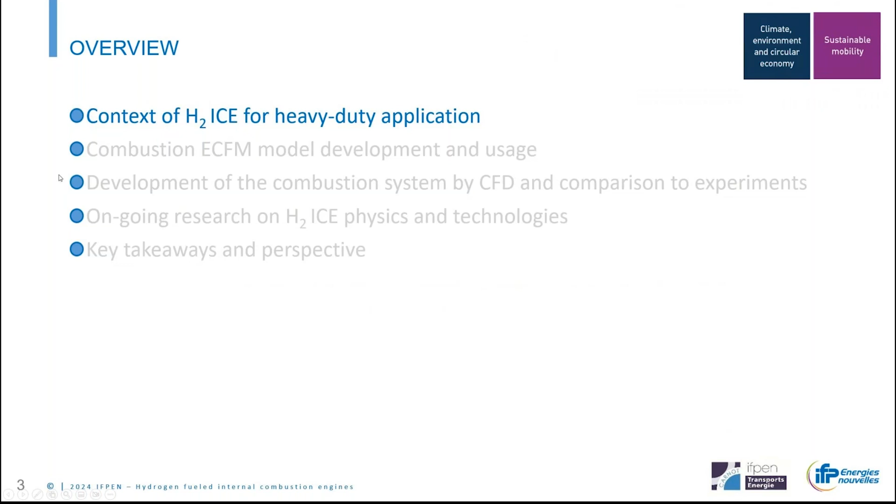So first, let's start with the context of hydrogen ICE for heavy-duty application. The question is why hydrogen ICEs for heavy-duty application?

On the right-hand side of the slide, you have the description of the CO2 emission regulation of the European Union as a function of the year. Here we have 2025, which is the year where we are. The regulation for the European Union is minus 15% in 2025, and we are going to have revised standards that are more strengthened, with a minus 43% CO2 emissions compared to the original standards, which was minus 30%. So hydrogen has a place to reduce this emission, and that's why it could be a good solution for heavy-duty application.

Second thing is the fact that it's considered a free carbon technology now. In the previous regulation, the threshold for hydrogen zero emission vehicles was 1 gram per kilowatt. Now it has changed a little bit. For example, for trucks it's 3 grams CO2 per ton transported per kilometer, and for buses and coaches, 1 gram CO2 per passenger transported per kilometer. So in a way it has been softened, and now hydrogen combustion systems are able to match this regulation.

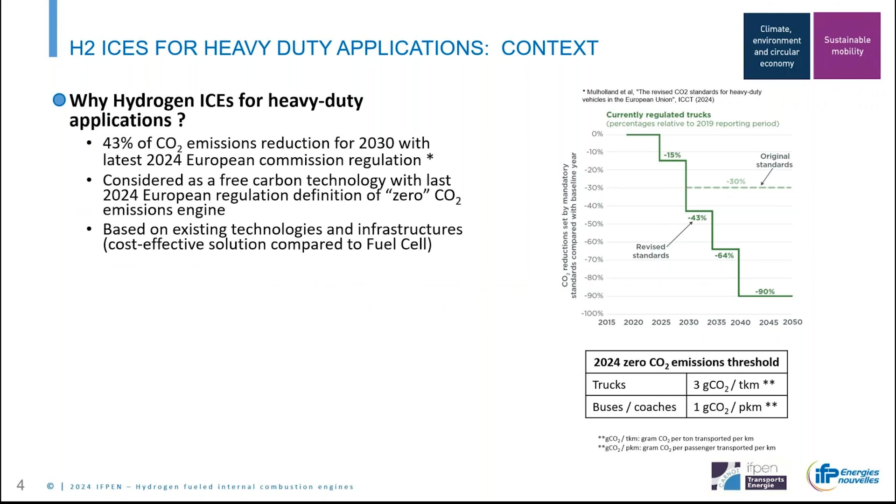It's also a technology dedicated to high power applications, where for example BEVs do not meet the specification requirements because of the mass of batteries, which is very high for heavy-duty application. So for example, for heavy duty, some light duty vehicles, off-road, and also motorsport.

H2ICE was identified, in fact, as a possible solution for heavy-duty application at IFPEN.

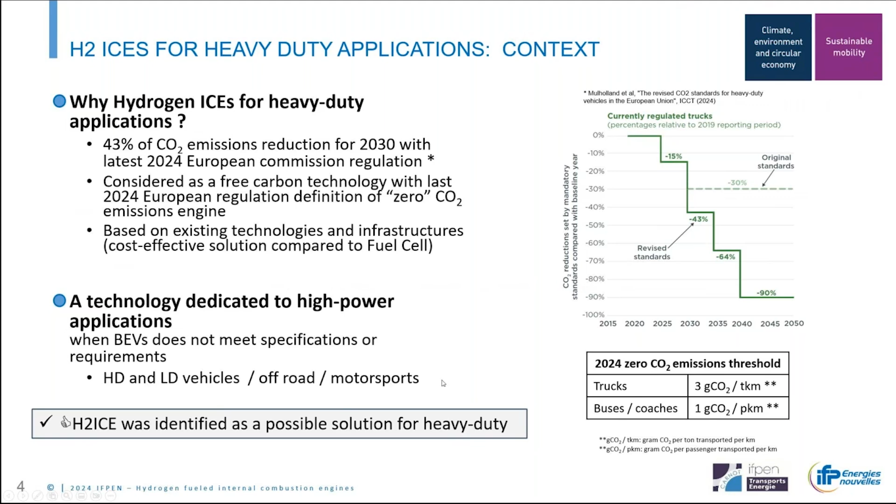Concerning the development studies that we realized at IFPEN and the activities on this subject, IFPEN is providing support for the development of hydrogen engines through several partnerships, which I will present an example of after, and by using appropriate, dedicated means.

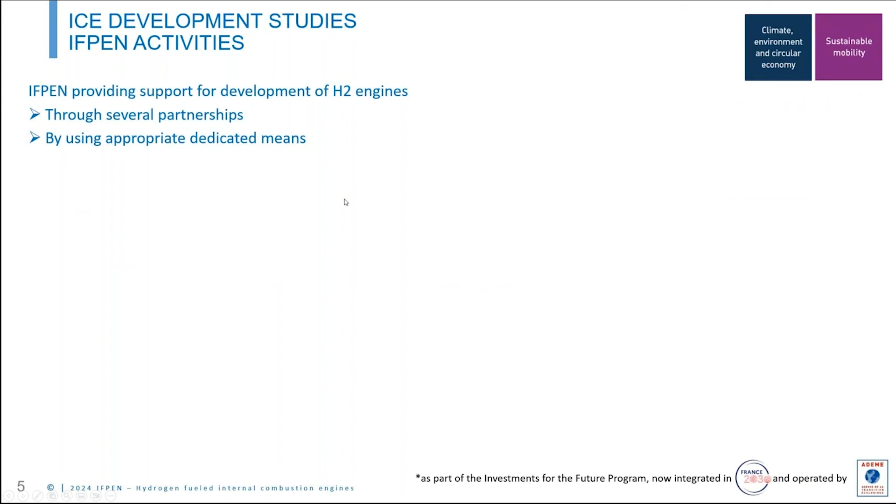This dedicated means, for example, CONVERGE. Here you have an example with a light-duty engine vehicle where we have recalibrated the simulation to the experimental results. We can also obtain results on the 3D side here with CONVERGE. So it's a good tool for us to design combustion systems, assisting with 3D simulation tools that have been developed, as we will see after, at IFPEN with the combustion model.

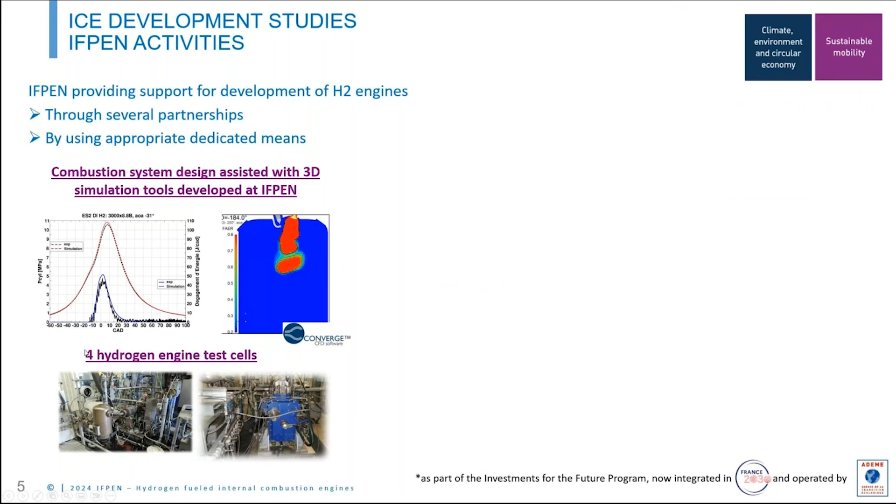The second thing we have is hydrogen test cells, to validate our simulation. So we have 4 hydrogen engine test cells at IFPEN in Solaize premises, in Lyon, France. And we are able to run some engines here.

Now, concerning the partnerships we have, I will give one example here. So it's the consortium example.

This is a direct retrofitting of an MD8, a diesel engine, into a hydrogen engine, the MH8 ICE, with port fuel injection and water injection, and a reduced compression ratio. As you can see here, it has been put inside a real truck, and a lot of people have been involved: Renault Trucks, for example, ADEME, the laboratory PRISME also, IFP Energies nouvelles, and Plastic Omnium.

So this kind of engine is a specific approach—just a retrofit from existing technology towards hydrogen, direct retrofitting. We replaced the diesel injector with a spark plug, and the injector by a hydrogen injector.

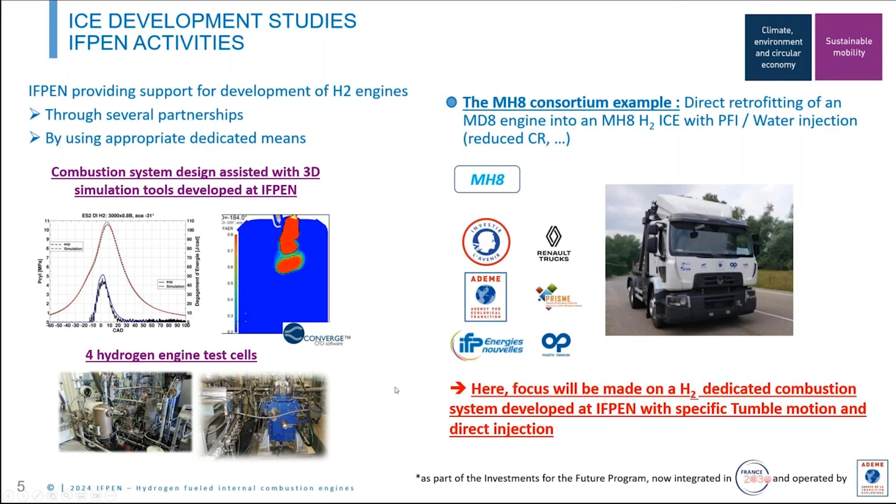But here, the focus will be on another way to create a hydrogen engine, which is a dedicated combustion system that has been developed here at IFPEN with specific aerodynamic constraints, a kind of tumble motion, and also direct injection, to improve the performance compared to this one.

And finally, concerning the introduction, at IFPEN we are using a V-diagram to design combustion systems. As you can see here, this is our workflow. It begins with a pre-design by simulation and advanced optical diagnostic tools, leading to a final design using 0D and 3D simulation tools in CONVERGE. We also use single cylinder engine manufacturing and design, and we run tests on the test bench on single cylinder engines. Then we can gain understanding through 3D CFD of the results obtained in the single cylinder engine experimental tests. Afterwards, for some applications, we can realize a multi-cylinder design and manufacturing, and even implement it on demo trucks.

Here, I will only focus on the things that interest us, in fact the CONVERGE part, how we develop the combustion system with CONVERGE. So it will be only on this part: the final design, how we optimize the system, and the understanding by 3D CFD of the results we obtained on the test bench.

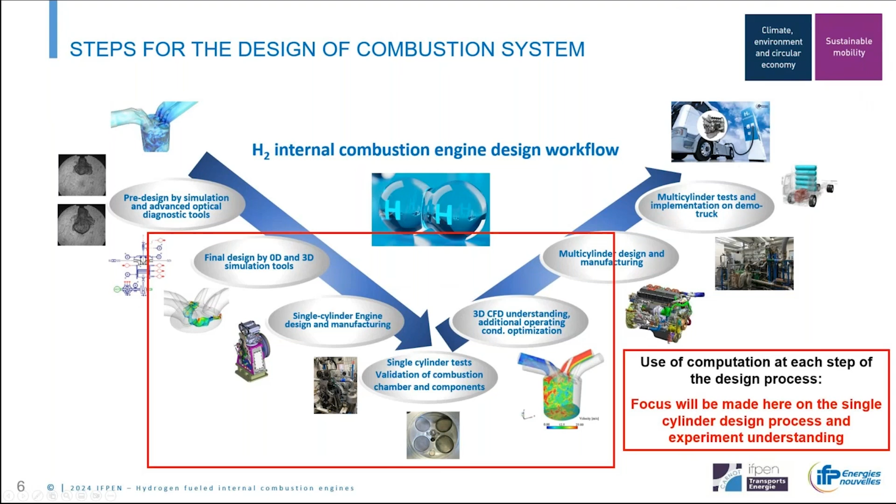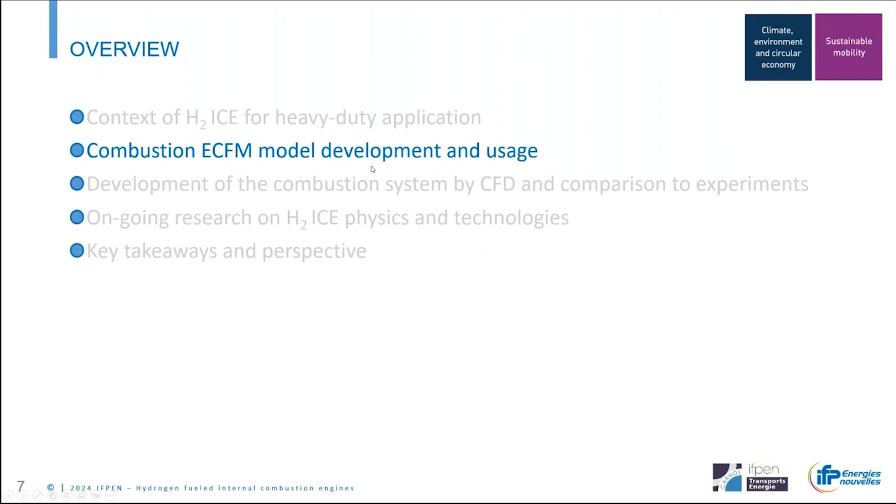Okay, so now I will switch to the model that we use for this development. It's the ECFM model development and usage, how we run the simulation and how we set it up. I'll let Olivier take this slide.

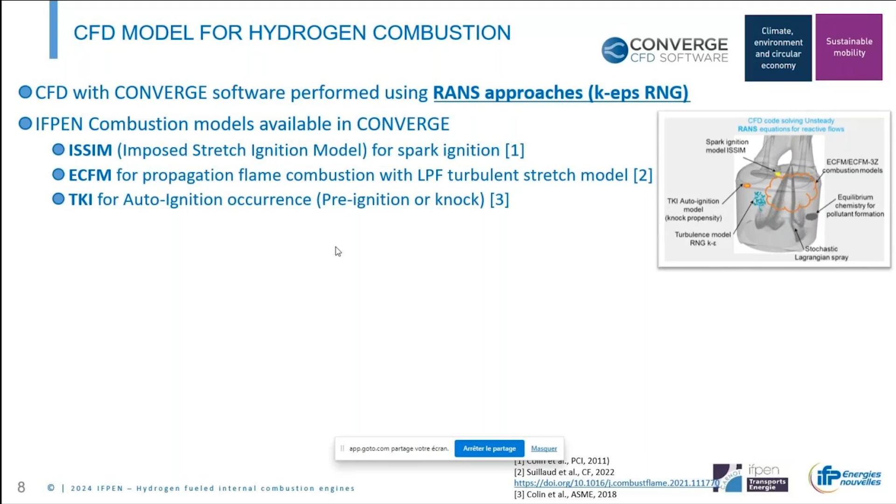So here we use CONVERGE for CFD modeling, with the RANS approach, though it can also be used with LES. In this simulation, we use the combustion models developed at IFPEN and implemented in CONVERGE with CSI. The first model is ISSIM, for imposed stretch ignition model. It's a spark ignition model that provides a flame surface at spark timing, and this flame surface is given to the ECFM combustion model.

This is the extended Coherent Flame Model, which accounts for flame turbulence interaction at the subgrid scale. Here you have a schematic view of the turbulent flame, and this flame is described thanks to a flame surface density equation, where basically the flame surface density is the ratio of the flame surface per unit volume. Today, I'm going to speak a bit about the last developments we've done in ECFM concerning the turbulent stretch model.

Finally, we also use the TKI model for auto-ignition occurrence, that is for pre-ignition and knock. TKI stands for tabulated kinetics of ignition, and it accounts for the auto-ignition delay and heat release rate through lookup tables. I forgot to say that for the reaction rate, it's simply the multiplication of the flame surface times the laminar flame speed, and this laminar flame speed is also tabulated like with TKI, using a mechanism prescribed by the user, with a pre-computation of this table before the CFD computation.

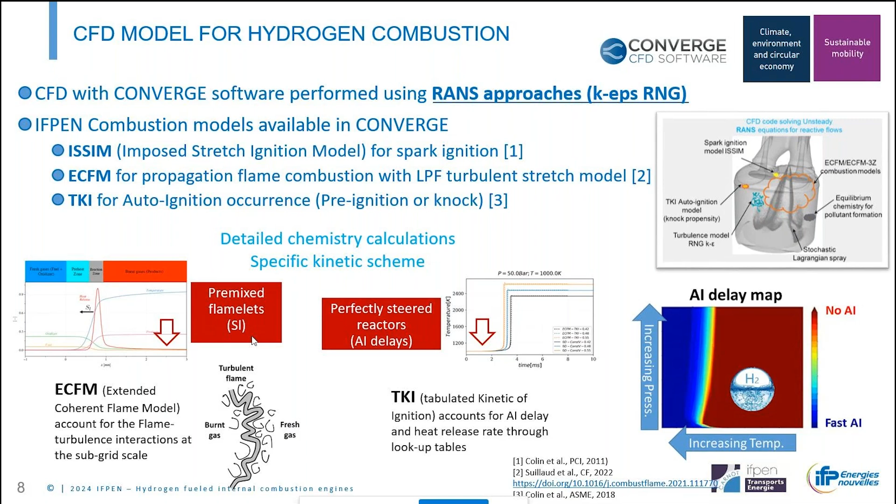So if we focus on the flame surface density equation and the improvements we've brought, here I present the flame surface density equation and the two major terms in the turbulent regimes: the turbulent strain term, AT, and the curvature term, kappa SD. This turbulent strain term can be decomposed into a mean contribution and an SGS contribution, and this SGS contribution is the most important one in turbulent flows.

Today in CONVERGE, we have different models available for the flame regime: the ECFM model, the Charlette model, the Bougrine model. But we observe that these models become quite inaccurate when going to H2, especially for lean mixtures and high turbulence intensities. This is why we worked on developing a new expression called LPF, for low pass filter. This model was developed at IFPEN for both the flamelet and the TRZ regime, and the final expression of the model is actually quite simple. It's given here.

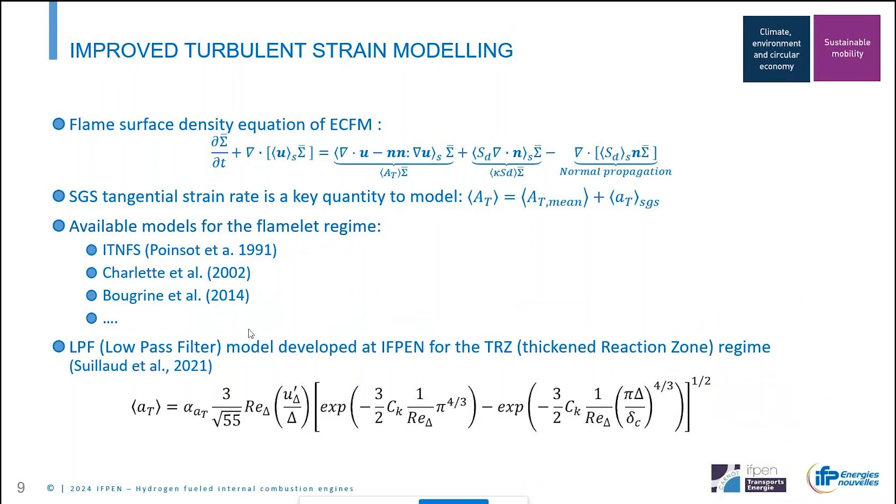So we developed and made a comparison of this model with DNS, first with DNS of isooctane and then DNS of H2 air flames, lean flames. For isooctane, the Lewis number is larger than unity. You have here the results at three Karlovitz numbers. Case A here is in the flamelet regime, while cases B and C are in the TRZ regime with much larger Karlovitz numbers of 20 and approximately 50. The DNS is shown in red, black circles, with Bougrine and Charlette also shown, and the LPF model in red.

You can see that the agreement of LPF remains good even at large Karlovitz numbers, unlike the Bougrine and Charlette models. We also further improved this model by making a normalization in LPF, which corresponds to the label IMP, shown in red and green. And you can see that the results with the normalized LPF version are even better than with the original version.

Finally, we made a comparison for lean H2 air mixture, and here you can see that with the last normalized version, we got very good agreement in terms of turbulent strain, even at the largest Karlovitz number. So this model is today available in CONVERGE 3.1, and it's given by the ITNFS flag of 8.

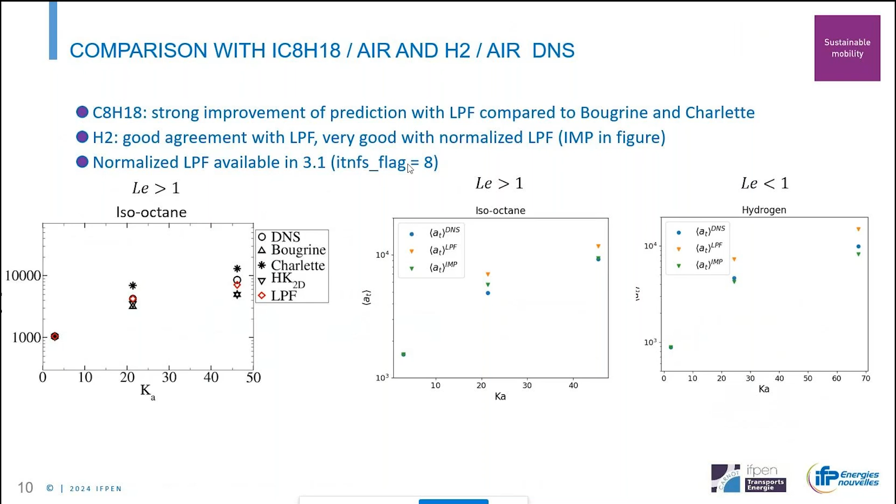The second point I wanted to address is the generalized fuel formulation for ECFM. In previous ECFM implementation in CONVERGE, we were limited to fuel components of the form CxHyOz, where X needed to be strictly positive, meaning we could not perform H2 combustion. Today with CSI, we have developed a new formulation where all fuel components can be of the form CxHyOzNm, with arbitrary values of the coefficients X, Y, Z, M, meaning we can now use CO, H2, and NH3 as possible fuels.

Let me summarize which species corresponds to what. In the unburned gas, you have the unburned fuels, given by UF underscore and the name of the fuel. If you use H2 or CO as a fuel, you need to name it differently - for instance, UF underscore H2 fuel, or UF underscore CO fuel. That's the only thing you need to be aware of. Then you have the other species in the unburned gas: CO, CO2, H2, and H2O. If you use H2 as a fuel, of course H2 is going to be set to 0.

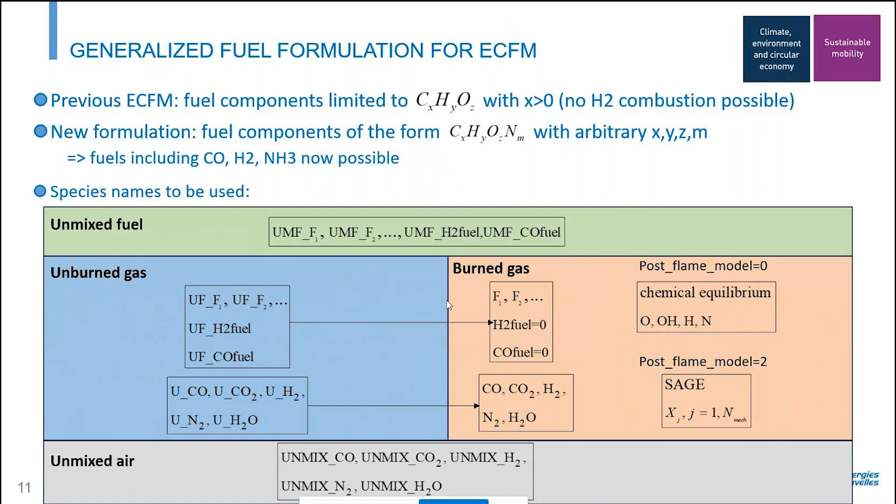Concerning the fuel oxidation paths, they are similar to before, just now generalized to include N atoms. For fuel oxidation by premixed flame or auto-ignition, we define a mean fuel CxHyOzNm as an average of all the fuel fractions in the unburned gases. This mean fuel is oxidized by two simplified reactions giving CO and CO2, and the N atom is simply transformed into N2. In the case of rich conditions, the unburned fuel is transferred to burnt fuel.

Now for the post-oxidation in burnt gases, as in the previous version, you have option 0, where you have a two-step fuel conversion into CO and CO2 if you have a carbon-containing fuel, plus equilibrium. Option 1 is equilibrium calculation for all species, and option 2 is a user-defined chemical mechanism solved by SAGE.

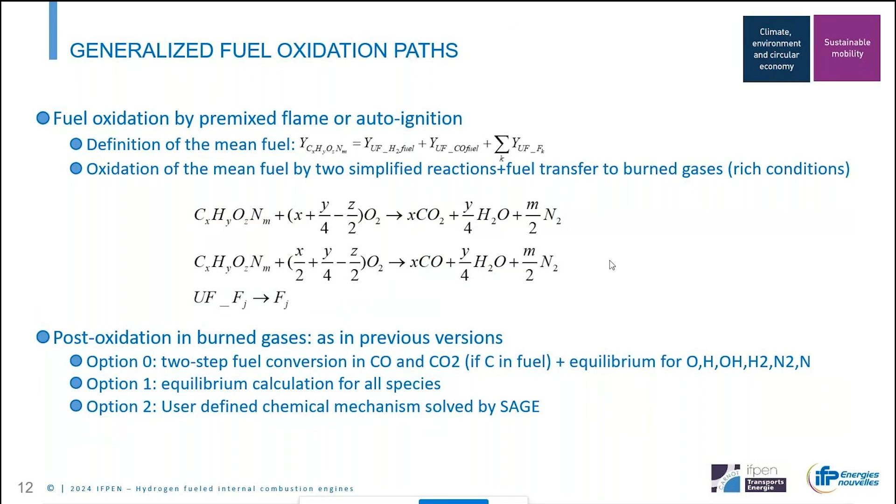I'm going to let Vincent present the following slides. Okay, thank you, Olivier.

Now to present what we have done with this stretching model: we tested this LPF turbulent strain model on a hydrogen fuel-air equivalence ratio variation, where we had experimental results on a turbocharged light-duty engine. We tested both Bougrine and LPF turbulent strain models on a light-duty hydrogen engine with a displacement of about 500 cubic centimeters. The operating point with hydrogen was 3000 RPM, 10 bar IMEP, with a fuel-air equivalence ratio variation from 0.3 to 1.

The combustion has been calibrated for all these points against experimental results using the parameter alpha ECFM. The key constant for the ISSIM model, used for ignition and initial flame kernel, is set at 3 for all cases - we kept the same constant for this parameter throughout. Then you can see here the variation we obtained for Bougrine and for LPF.

What you can see is that for Bougrine, we have a large variation, as you can see here, alpha ECFM as a function of fuel air equivalence ratio. A large variation of the constant with fuel air equivalence ratio, from 1.8 for low fuel air equivalence ratio to less than 0.1 for high fuel air equivalence ratio, which is quite difficult then to calibrate, for instance, when we have experimental results.

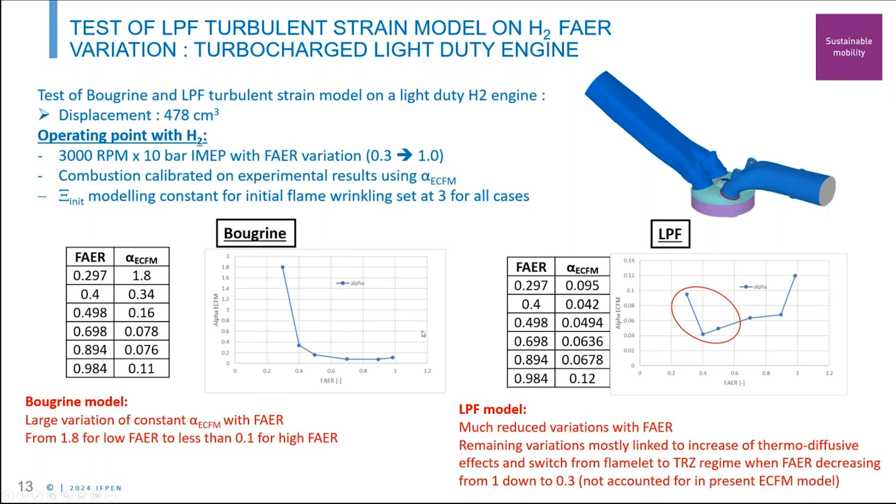So now I present a little bit how we can set up a multi-fuel ECFM engine setup. Here's an example of the CONVERGE Studio settings that have been used to correctly set up, for example, a multi-fuel ECFM case with hydrogen and CH4 mixture.

On the left-hand side, you can see here the tab for the combustion modeling settings. In general, you put the fuel species name here, so you have methane and hydrogen. As Olivier said, we needed to change this. In fact, we must set this fuel species name different from H2, because H2 is a product, not a reactant, so it must be set differently.

So we called it here hydrogen, but you can use H2 fuel or whatever you want, as long as you know what it is. In terms of the polynomial, so NASA thermodynamic polynomial, you need to set hydrogen the same as H2. So you just need to copy the NASA polynomial of H2 to hydrogen. That's all.

Then if we look at the model tab, for ECFM or ECFM 3Z, here you will say that you want an ECFM setup, and in general you will have all the constant parameters of the model. So the alpha ECFM that I mentioned before, 1 - you can see it here, it was 0.08 for example. That's the constant for turbulent stretch. You also have a constant that we don't use here at IFPEN, which is a constant for the surface density destruction term.

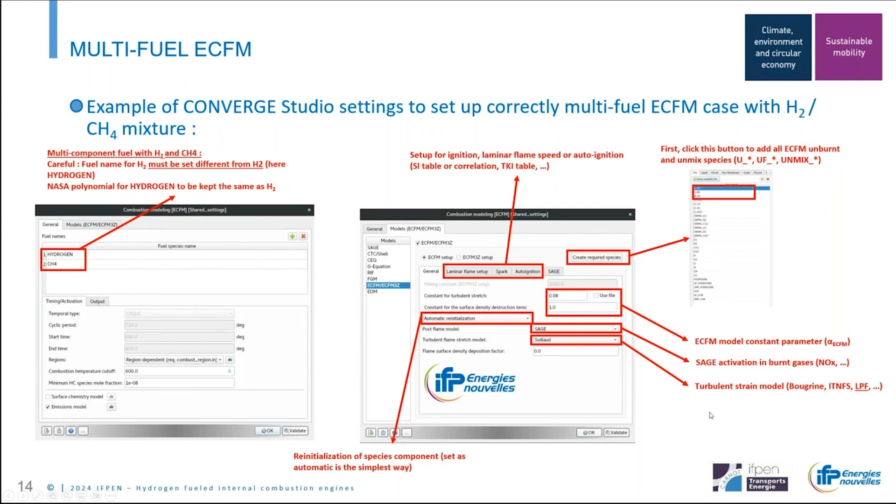Now that we have described how we set up this thing, we can also do some main post-processing variables that are a little bit different compared to Sage. We're able to do much more things with ECFM.

As you can see here, we have the output of ProgVar, the global progress variable for the combustion. You also have the progress variable for propagation mode and for auto-ignition mode. This enables you to look at the spot where you could have auto-ignition.

I've done a 3D post-processing with the flame that you can see here. It's an isosurface of the flame, C equal to 0.5, so 50% of the fuel mass burnt, so it's a flame. It's colorized by the C auto-ignition, which corresponds to the kind of auto-ignition inside the engine. The lighter it is, the more it's where you have an auto-ignition spot. That enables you to see where you have auto-ignition points and to improve your engine design, etc.

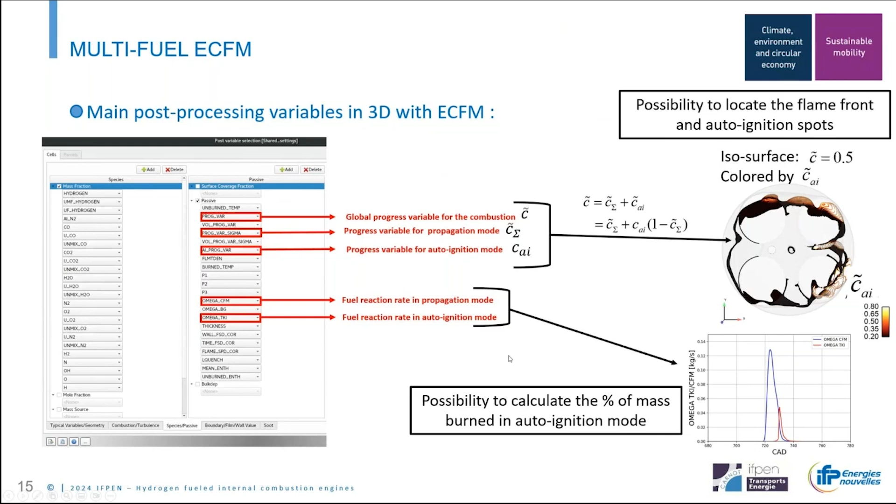Another thing you can do is use omega CFM or omega TKI to look at the fuel reaction rate in propagation mode and auto-ignition mode. You also have the possibility to calculate the percentage of mass that is burnt in auto-ignition mode, and so to know where you will have knock, compared to Sage where it's only based on a pressure curve. Here you have something specific that enables you to calculate this percentage and to see where you have a chance of knock.

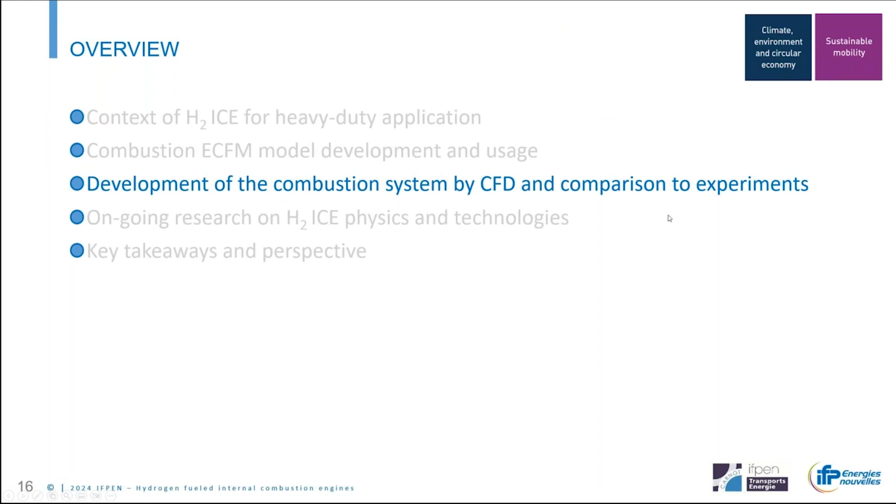Now that we have described the model a lot, I will switch to the development we have realized on the combustion system by CFD and the comparison to the experimental results.

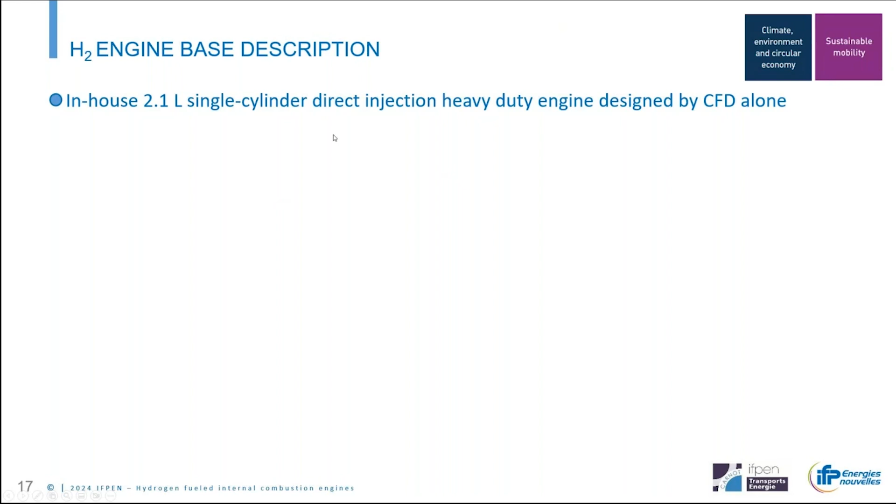I will first describe a little bit the hydrogen engine. It's an in-house 2.1 liter single cylinder direct injection heavy duty engine that has been designed by CFD alone.

Here you have the little description, so you can see the intake ports and exhaust port. You have the injector placed in the middle, between the intake ports. You have the spark plug at the center of the chamber. The displacement is 2.1 liter, compression ratio around 12. The injection system is the Phinia one, CHG15, so 15 grams per second at steady state flow rate, at a maximum injection pressure of 40 bar.

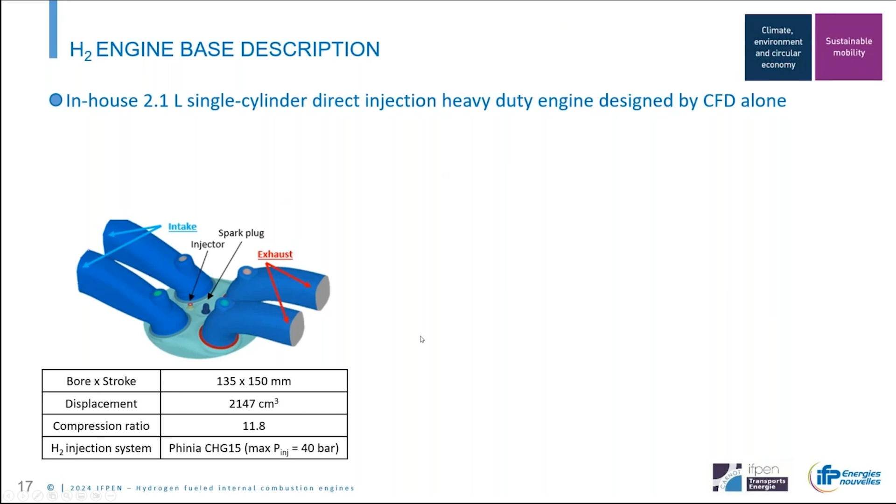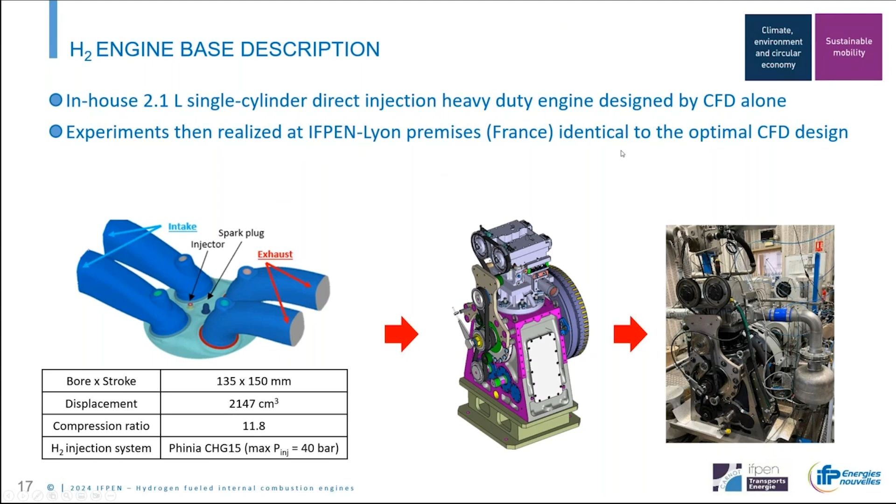This engine has been manufactured, and the experiments were realized at IFPEN Lyon premises in France, identical to the optimal CFD design.

Let's have a look at how we decided to optimize the system. Different topics were addressed with CFD concerning the architecture and the targeting, which one to choose to have better mixing and better combustion.

First we decided to optimize or to see what was the best engine architecture for mixing. That's what you can see here. On the left-hand side of the graph, the TKE. You can see that using a kind of tumble, it's a swumble concept, something we have developed here at IFPEN, that is a mix between swirl and tumble, enables you to have more turbulence. You can see you can reach higher levels of turbulence here, as a function of crank angle degree. At top dead center, that is 720, we have about 100% more turbulence compared to the swirl-based design.

If we look at the standard deviation of the fuel air equivalence ratio, which corresponds basically to the mixing quality, you can see that at top dead center we have a more homogeneous mixture, so a lower standard deviation on fuel air equivalence ratio. You can see this also on the 3D visualization, with the fuel air equivalence ratio on two cut planes of the combustion chamber. If we compare the swirl to the swumble concept, clearly we have better mixing with the swumble concept. This means architecture with a high turbulence level is clearly beneficial for mixing and for the hydrogen combustion system, so the chosen one was the swumble one for this architecture.

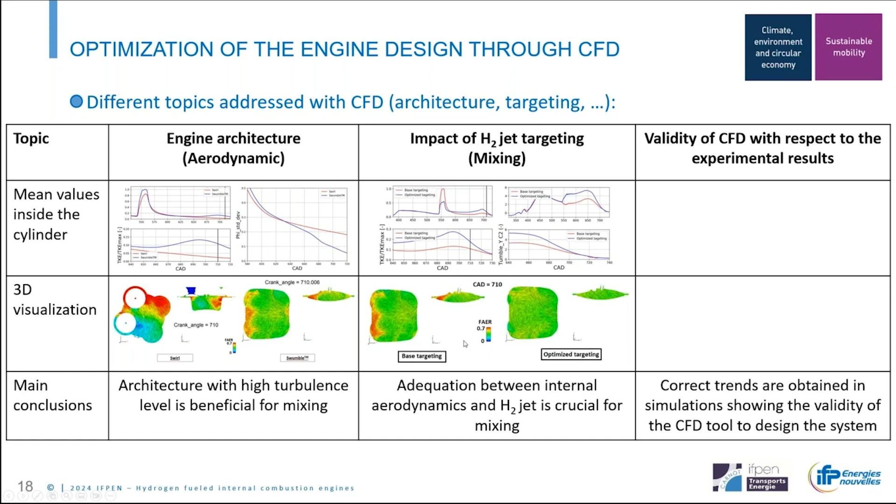So first, more tumble, as you can see here on the right-hand side, if you compare the base targeting to the optimized one, and then more turbulence, as you can see here. And in the end, having more turbulence enables you to have more mixing, as you can see on the 3D visualization here.

If we compare to the base targeting, here on the optimized one, we have a quasi-homogeneous mixture. So the adequation between internal aerodynamics and H2 jet is crucial for mixing. And finally, we have validated this CFD with respect to the experimental results, doing the feedback from the experimental result to 3D CFD to the experimental results. We have here a comparison between experimental results and simulation.

You can see that we have a good matching on the in-cylinder pressure and also the apparent heat release rate. Here we have also the flame propagation. You can see more on the intake side because we have more turbulence on this side. So correct trends were observed in simulation, showing the validity of the CFD tool to design the system. That was the key point.

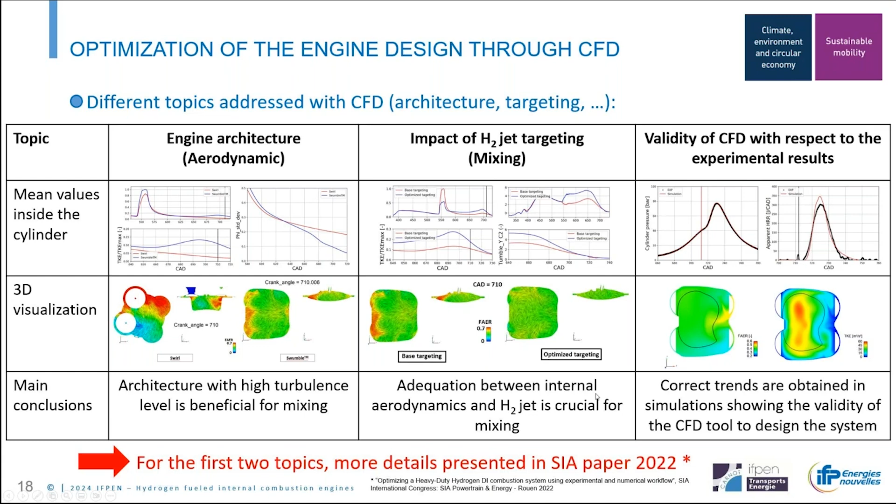So the first two topics are more detailed in the presented paper SIA 2022, and if you want, you can have a look at this paper for more information.

After that, we have decided to realize a spark advance variation of an operating point, this one, so 1,200 RPM, 9 bar IMEP, with a start of injection of 260 CAD before top dead center at lambda 2.5. We have realized the spark advance sweep from 0 to 14 CAD, and this was performed for feedback.

And after an alpha ECFM calibration at optimal spark advance, that's all, we just calibrate the alpha ECFM on this point. We obtain, in terms of pressure and burn duration, these results. So you can see that we have good matching across the whole spectrum of the spark advance variation.

Only for late spark advance, you can see that we are not matching well, but it's linked to the fact that we needed to have more injected mass to keep the same IMEP, which was not possible for us due to the consuming time of the simulation. So yes, that's the only point. Otherwise, we have a good matching, so good accordance within the whole range of spark advance sweep. And also the fact that we have the same indicated efficiency of 47% if we compare experiments with simulation.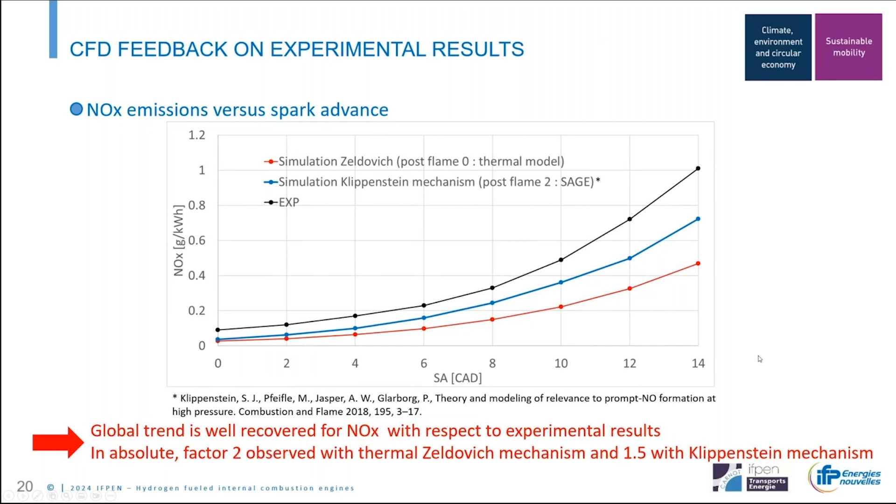Okay, now I'll describe a little bit the results that we have obtained with this engine. So based on the proposed CFD design, we have realized the experimental test campaign on a full engine map, as you can see here, from 900 RPM to 1900 RPM, and from 4 bar IMEP to 22, 23 bar IMEP. And you can see that we obtain quite good results. In fact, we are able to obtain a maximum indicated efficiency of 48% on the core of the engine map.

This result was obtained with a specific model of a double-stage turbocharger architecture for this kind of application, with a lambda ranging from 1.8 to 3. In line with the previous CFD results, as you can see here, the 1200 RPM 9 bar map, we catch the 47% indicated efficiency, as we found just before.

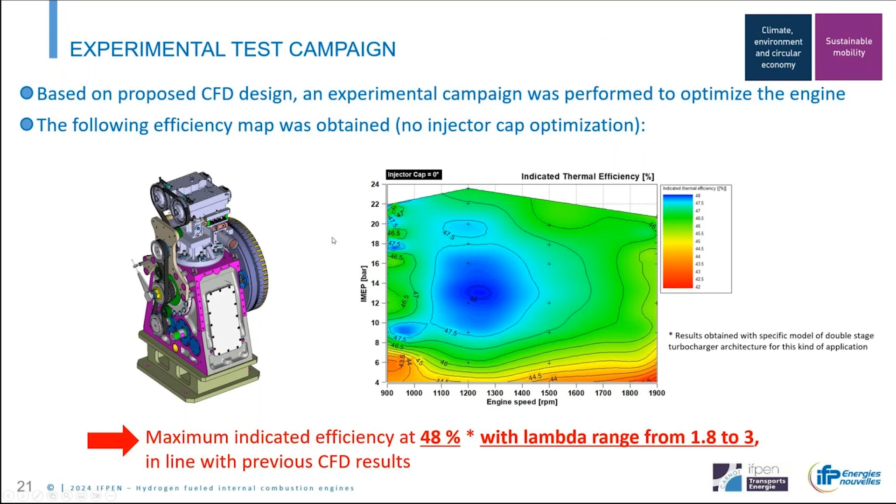Okay, so you can see that we are able now to model and describe the engine and to have good results and to design combustion systems for hydrogen. But there are also some remaining challenges for H2 combustion, and there are three for us. We are studying here at IFPEN three main topics that remain challenging for H2 modeling.

First, the hydrogen injection and mixing. As you can see, using RANS or LES, you don't have the same results, which means the RANS and LES mixtures are quite different, and the supersonic hydrogen jet has associated vortices that are difficult to model with RANS. That's why LES seems to better diffuse the hydrogen compared to RANS. Significant differences are observed between RANS, LES, and real mixing, and we have work to do on this subject.

The second subject is H2 combustion and wall heat transfer. We have done some 1D DNS to see the difference with methane. You can see there is a lot of difference if you compare, for instance, hydrogen at different richness. Also the flame propagation, because the Lewis number is below 1, you have thermodiffusive effects that affect the flame wrinkling, and hydrogen has much more wrinkling compared to methane flame. So that affects the wall heat transfer too, which is different compared to conventional fuel like methane.

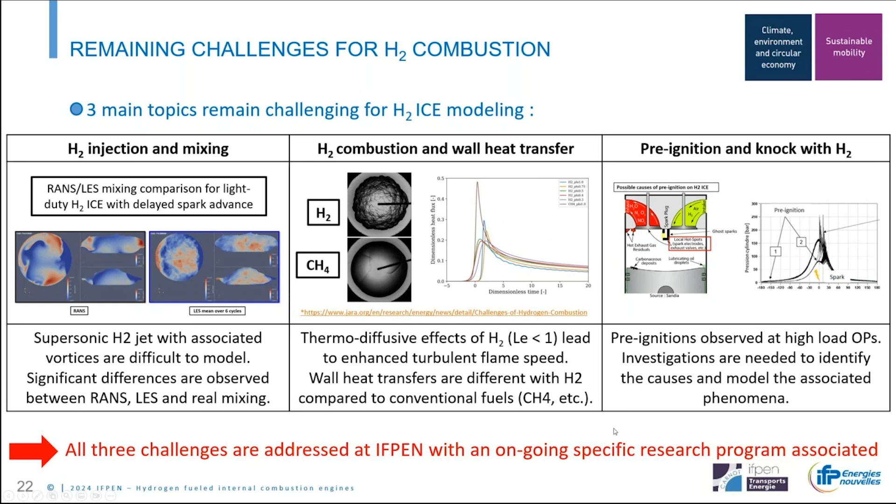So it's something we need to investigate, and that's what we are investigating now - preignition and knock. All these three challenges are addressed at IFPEN with an ongoing specific research program, which I'll now present. First, as I said, the hydrogen air mixing. We are using experiments to measure the mixture between hydrogen and air.

This method is called the inverse PLIF method, done in an HPHT vessel. We inject inside the vessel and observe the diffusion of the jet using this fluorescence method to get the mixture - as you can see here, it's the mass fraction of H2 inside the cell. We compare it to RANS calculations, for example, and here you see that RANS calculation is less diffusive compared to average experimental results. So that's something we use.

The other thing we use is Schlieren visualization. You can see here there is not so much problem - we are able to match the penetration quite well, for example here for the Phinia CHG10 injector.

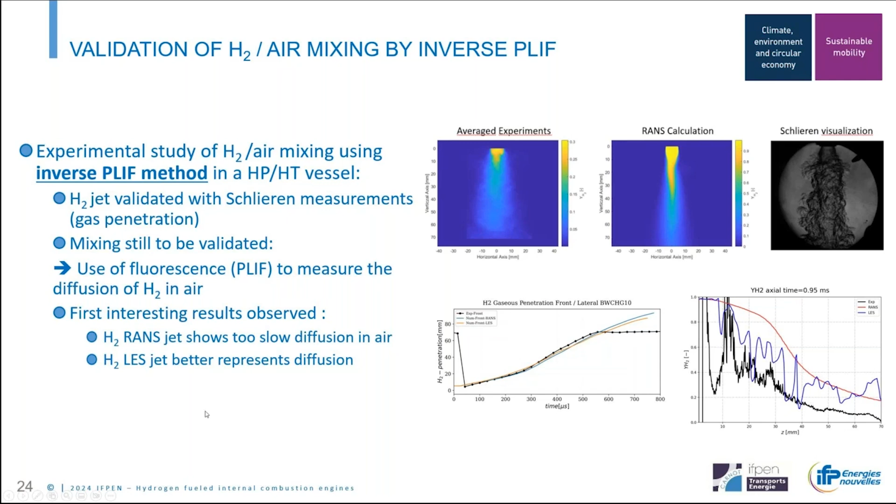The first interesting results show that H2 RANS jet shows too low diffusion in air, while H2 LES, as you can see on the axial line, better represents the diffusion. On the right-hand side graph, we compared experimental results, RANS results, and LES on one single shot, and we are able to better match the diffusion with LES compared to RANS. Some work to do on the RANS side to get a better description of the mixing.

Concerning heat transfer, we are also working on that. As I said before, we studied in 1D DNS the flame-wall interaction between CH4 and H2. You can see that the quenching distance is quite low at stoichiometric conditions for hydrogen compared to methane, but at lambda 2, hydrogen reaches almost the same quenching as methane. In the end, we have a lot of difference in terms of dimensionless heat flux between methane and hydrogen, and hydrogen quenching distance increases with dilution, as we see here.

To study that in more detail, we will use a future experimental program studying the HPHT vessel environment. We will measure wall heat fluxes here on a specific geometry designed to generate tumble, and get, by using thermocouples, wall heat transfer on this slide.

We will also use inverse PLIF technique to measure the H2 mass fraction at ignition, to be sure that we have the same mixture when we compare with experiment, and visualization of the flame front by Schlieren. Here you have a simulation where you can see the mixing and flame propagation inside the vessel. It's what we study now.

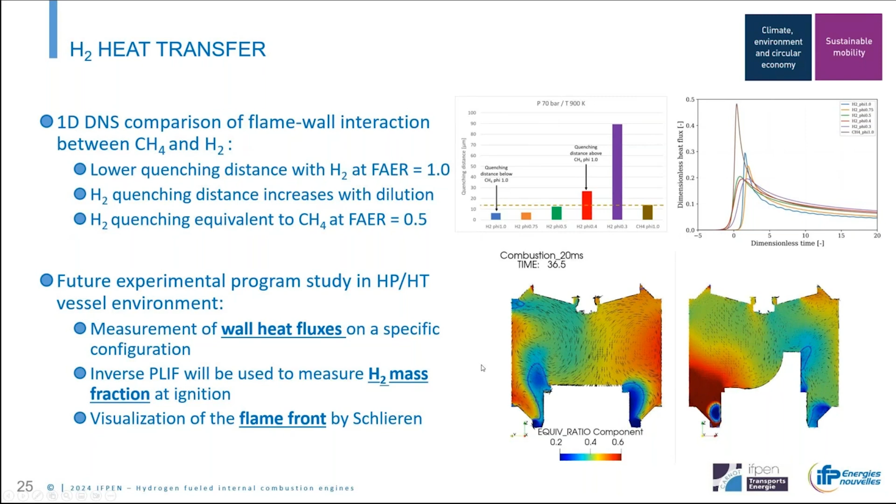Finally, on my aspect, we are also studying preignition. As you can see here, we are using an endoscope inside a light duty engine to try to see where the spots are where we can have preignition and knock, using an intensified camera.

So it's done at IFPEN in Solaize. Here you have a visualization of the flame, the real flame inside the engine, experimental, with the spark that you can see here, the very light one.

Preignition is a major concern for H2 engines for efficiency, full load capacity, and also durability. That's why the objective is to understand the origin of preignition, to see what the flame propagation is, to locate the spots of preignition, and to try to manage and remove these spots to avoid preignition.

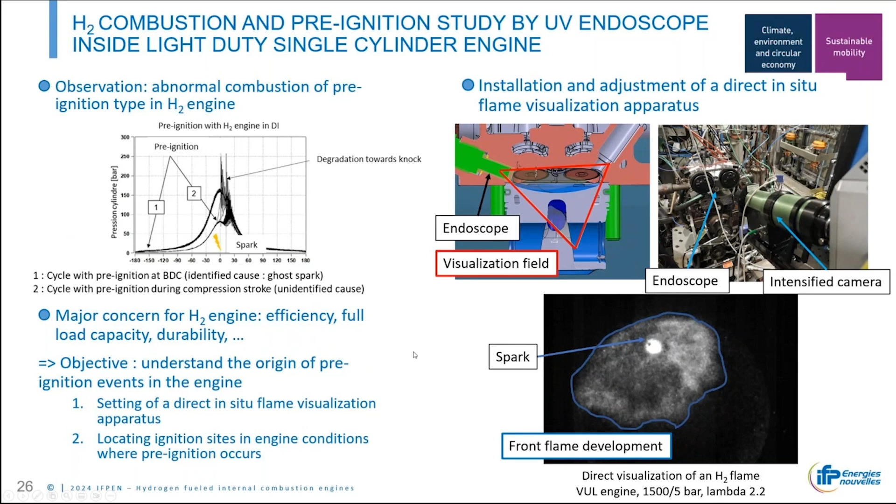I will let Olivier present this slide, it's more on the modeling aspect. Okay, thank you, you can keep the slide. So we are currently working on two approaches. We are still working on ECFM.

The first step is to account for preferential diffusion on the consumption speed at the resolved scale, introducing the stretch factor I0 in the equation shown here. I0 is today equal to 1, but when you have Lewis number inferior to unity, like for H2 mixtures, I0 can be larger than 1. So the first thing is to include this effect at the resolved level. Then the most difficult part is to account for this preferential diffusion at the SGS level, and also to account for the high Karlovitz or TRZ regime.

This is ongoing research in what we call ECFM-HK, for high Karlovitz. But we are also developing at the same time the thickened flame model, TFM, because it is a possible alternative to ECFM for SI engines.

We have recently observed that the response of TFM to stretch is altered by thickening, and so TFM in presence of preferential diffusion doesn't respond correctly. This is why we proposed a correction recently, which was presented last year at the European Combustion Meeting, and that we will publish soon.

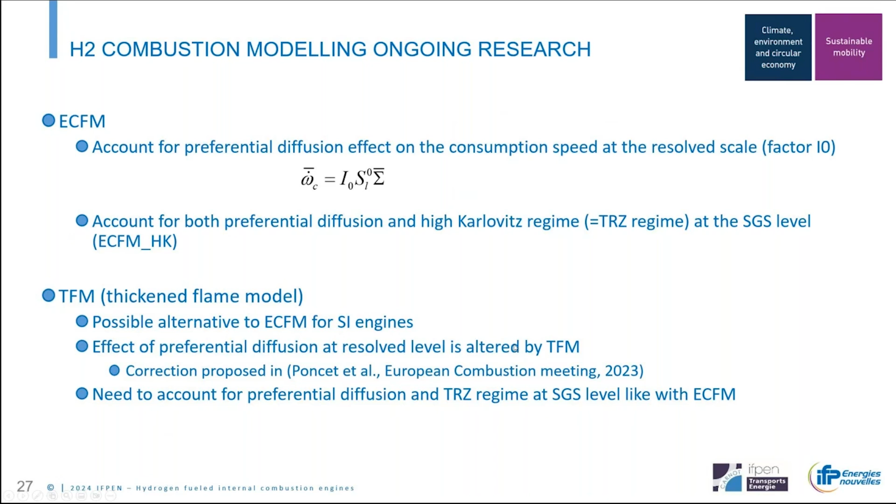Now I will switch to the key takeaways and perspectives of this study. First, we have a dedicated heavy-duty engine at IFPEN, a 2.1 liter single-cylinder engine developed entirely at IFPEN. The whole process of design and optimization has been realized through CFD with CONVERGE, showing that we need a high turbulence level required for H2-air mixing. That's why tumble motion is preferred for the moment for this kind of application.

We saw also that the specific targeting of the injector enables further improvement for mixing and also turbulence, and so for the combustion. We have also observed a good indicated efficiency of 47% that was predicted by CFD and confirmed experimentally, with even 48% for other operating points.

The experimental results show that further modeling improvements are required for mixing, abnormal combustion, injector validation, and also the combustion itself. A lot of work needs to be done, but IFPEN is actively working on this subject to improve CFD modeling of H2 combustion with CONVERGE, through different research programs that include advanced experimental tools that I have described just before.

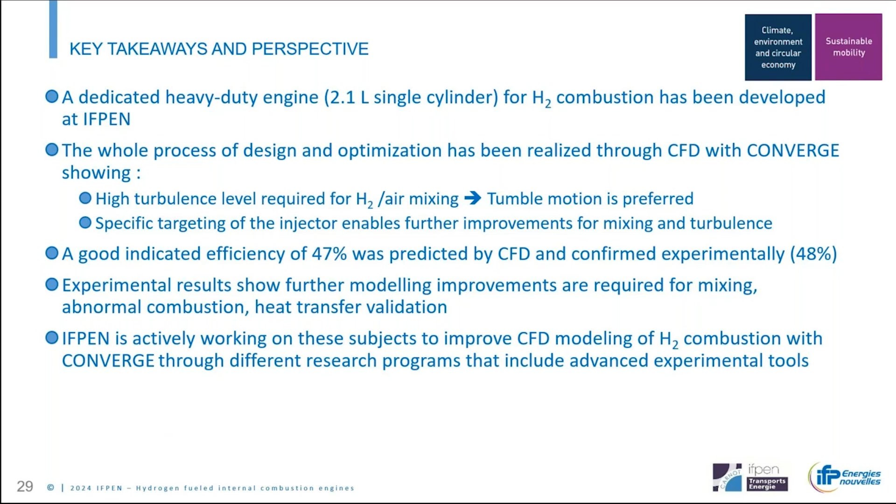And just to finish, I would like to thank all my colleagues who work on this subject, the CFD team, development team, Olivier, etc. And thanks to all our partners: Tenneco for providing the spark plug, Phinia for providing the injection system, and Danielson Engineering for manufacturing the engine. So thanks to all of them, and thank you for your attention.